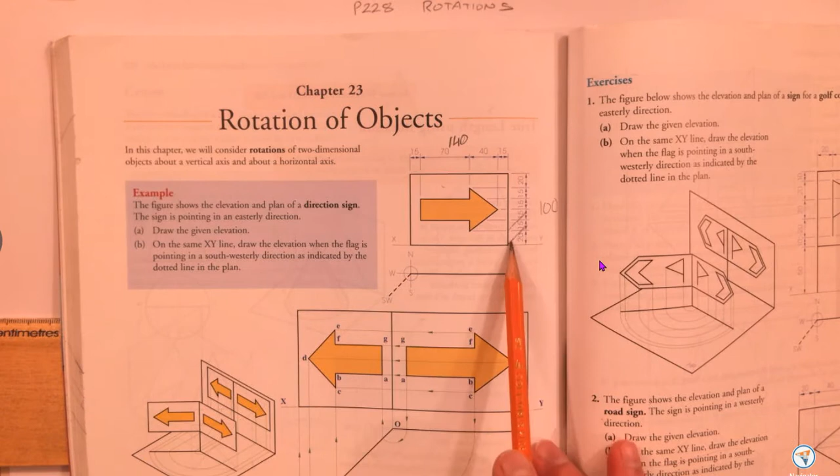You've got a pile of measurements here, 15, 70, 40, 15, and then you have a load of measurements down the side. Basically what it means, we draw our XY line. It's 100 millimeters high, 140 millimeters wide, and then we can set in the grid. So when I come to the sheet there, keep close to the top of the page.

When you're doing the question, step down maybe 120 mil from the top. So we want it up close to the top and in the right hand corner. The measurement, 100 high, 140 wide. We draw the box. Our grid, step over 15, 70, 40, and that leaves 15 on the end.

And then when we're working up the way, it's just 20, 15, 15, 15, 15, and 20 left on the top. And then you can set out a grid, and that let us put in the shape of the arrow. I have the arrow put in. Now we need to draw the plan view of the sign.

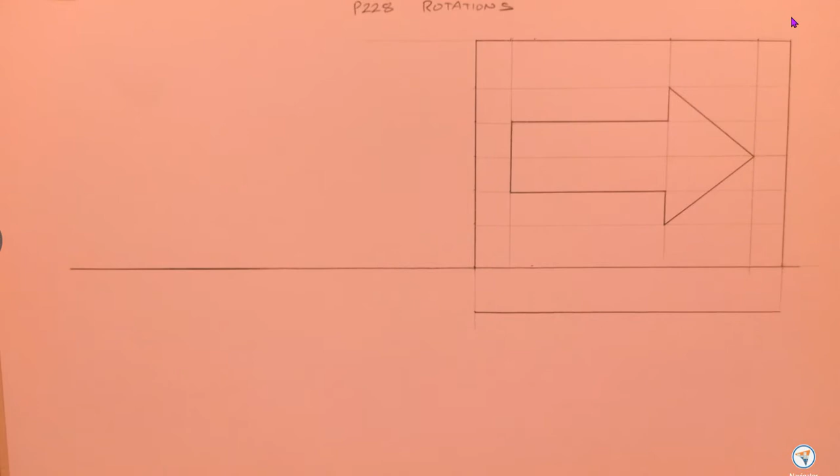To draw the plan view, step down 20 mil, and we just draw a line across. So it's a flat vertical surface, that's why it looks like a line in plan. So our elevation is here, and then the plan looks like a line.

Now back to the question. The figure shows the elevation and plan of a direction sign. The sign is pointing in an easterly direction. On the same elevation, draw the given elevation. On the same XY line, draw the elevation when the flag is pointing in a southwesterly direction, as indicated by the dotted line.

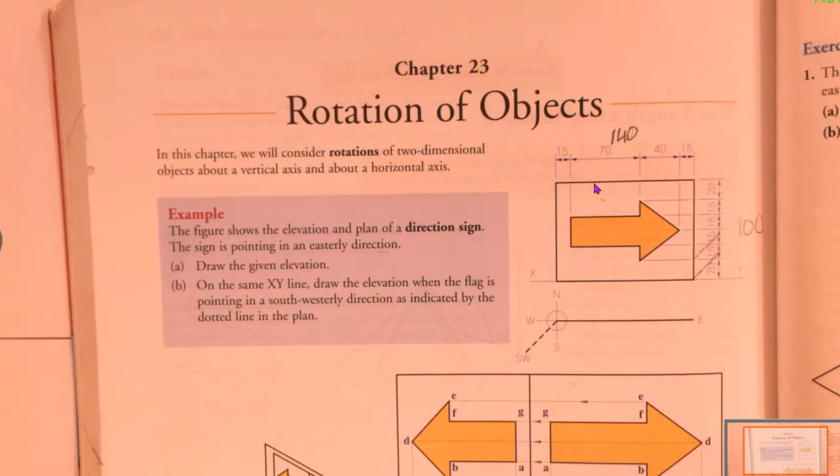So the flag, and if you think of a compass, here's the compass view in plan, it's pointing easterly. They want it to change to a southwesterly direction, which is just a 45-degree angle down in that direction. So when I come to do that, the sign is originally here, we need to change it to a 45-degree direction down there. So we've got our starting position, and we're going to end up with a new position.

Now, as always, we're going to label the drawing. So we'll call the corners 1, 2, 3, and 4. That's our elevation view. When we come down to the plan, the points are directly below. So 1 is here, 2 is in the same position because 2 is directly over 1. 3 and 4 are in the same position because 3 is directly above 4.

Now we have to rotate this sign into a new position. So when it moves in plan, it's also going to move the elevation. So we're going to end up with a brand new sign that's going to basically flip over. So if we took, for example, the phone, what's going to happen is the phone is going to flip right over and into a new position here. And we're going to draw the elevation and plan of that.

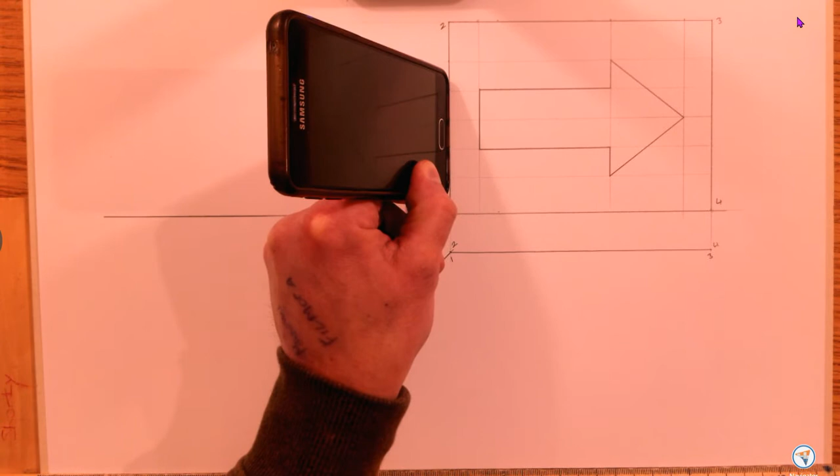In the plan view, it's as if that phone is going to be hinged here, nailed here, and I'm going to swing the phone around into the new position. So it rotates around. So that's where the new phone is going to be in plan. So that's the movement we're going to make with it. To do that, we use the compass.

Our hinge point is here, because it's the joint between the two lines, and we move points 3 and 4 around. So we swing points 3 and 4 around, right around until it hits our line. So point 3 and 4 both come around and they hit at the new point here. So what we've done is we've got the sign and we've moved it from this position to this position.

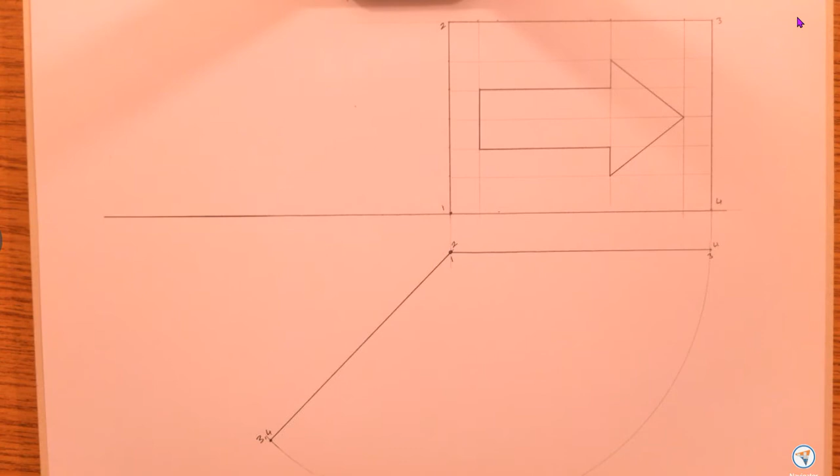We've got our plan. We need to draw an elevation. So we're just going to project an elevation up from the plan like we always would. So if I want to draw an elevation, I project my lines straight up. 1 and 2 are staying in the same position, so I don't need to worry about those. 3 and 4 are just going straight up.

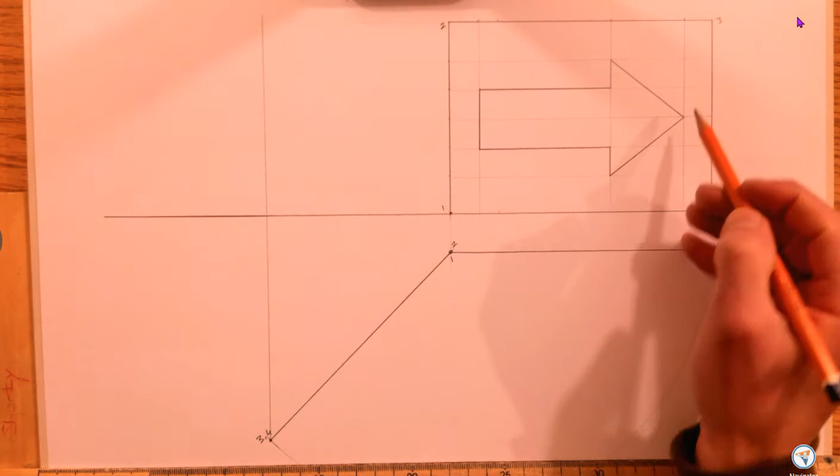The height of them won't change. So point 3 and 4 have been projected straight up. The height of point 3 is over here. It's not going to change, so I just project straight across. So I take 3 straight across to form my new point 3. Here's point 3. So 3 was brought straight across.

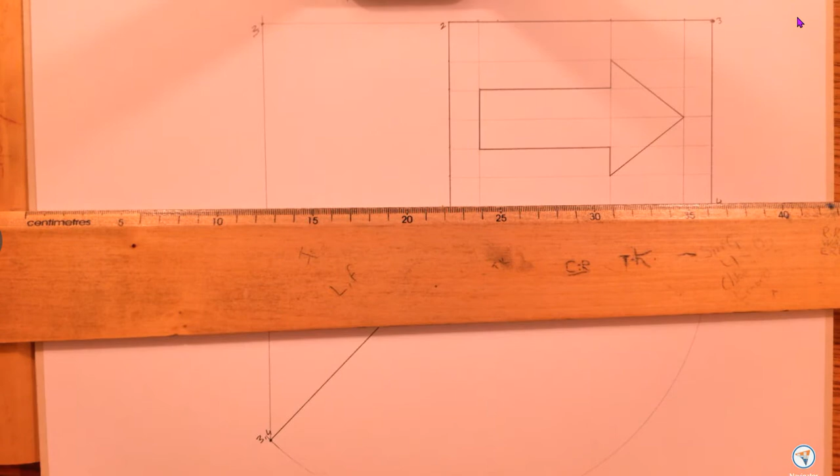Point 4 is the exact same thing. Here's point 4. And again, its height doesn't change, so it's already done for me. It comes straight across. And there's point 4. And that gives me the new position of the sign. So here is my new sign.

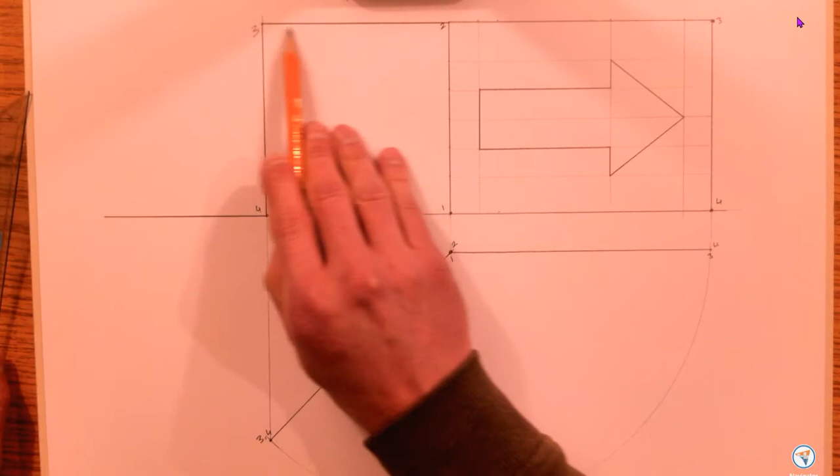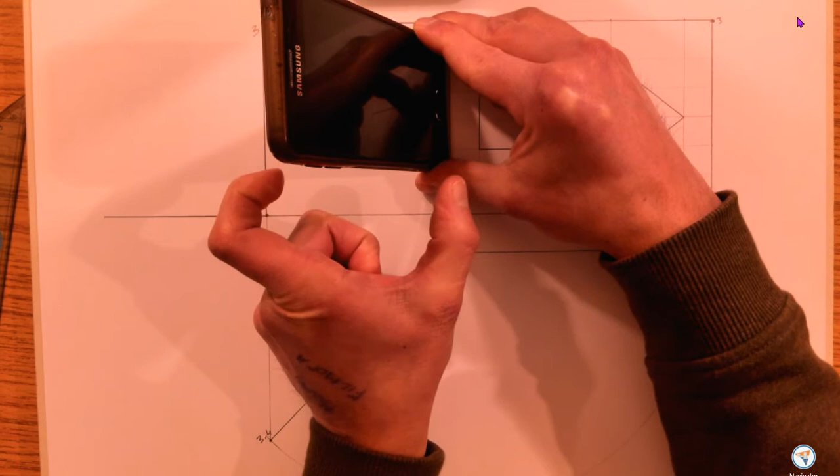And it looks kind of squashed, exactly like the phone does. When I get the phone laid down flat, it looks really wide. When I take the phone and flip it up over, it looks much narrower. So now it's a lot narrower than it was. That's the exact same principle.

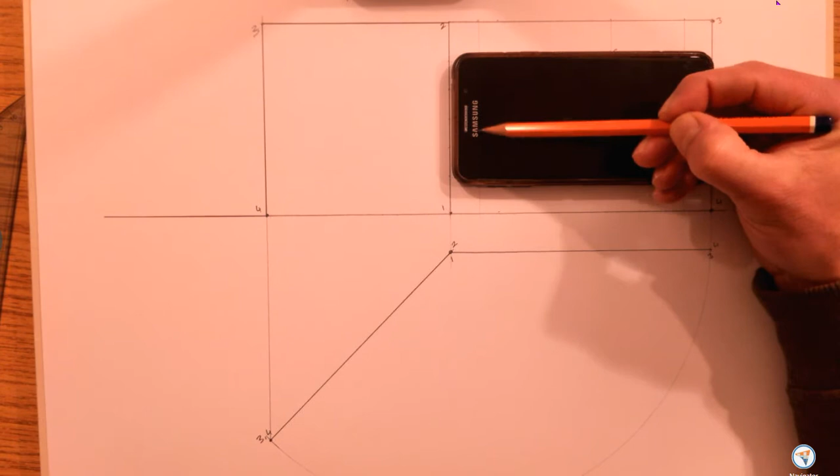Right, we're moving on to the arrow. The arrow is written on the sign or drawn on the sign. I've labelled it up. It's the exact same principle. If I look at my phone again, the Samsung is written on the phone. It's flat on the phone. When I look down in plan at that, I can't see it, but I know it's here. That's where the Samsung sign is.

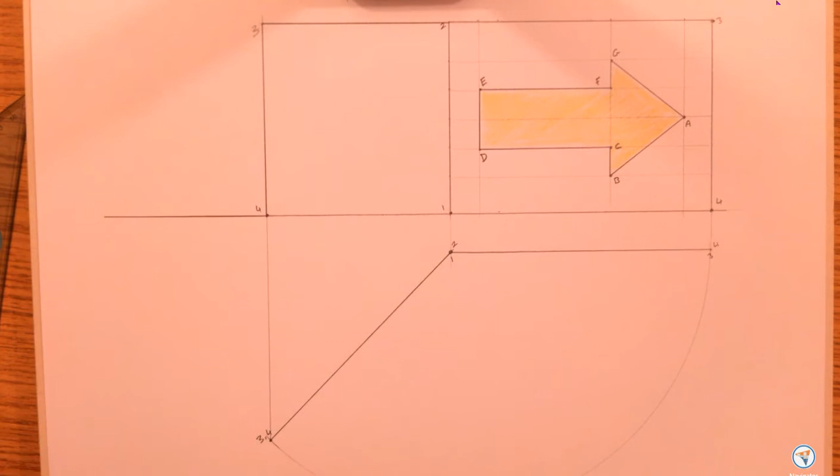So when I move it from there, that's the elevation, to the plan, which is here, the writing is here. It's the same thing. Even though the sign is flat, I know that this arrow is down here. And again, to find the points where it is, I can't see it, but I bring the point straight down. So point A, straight down.

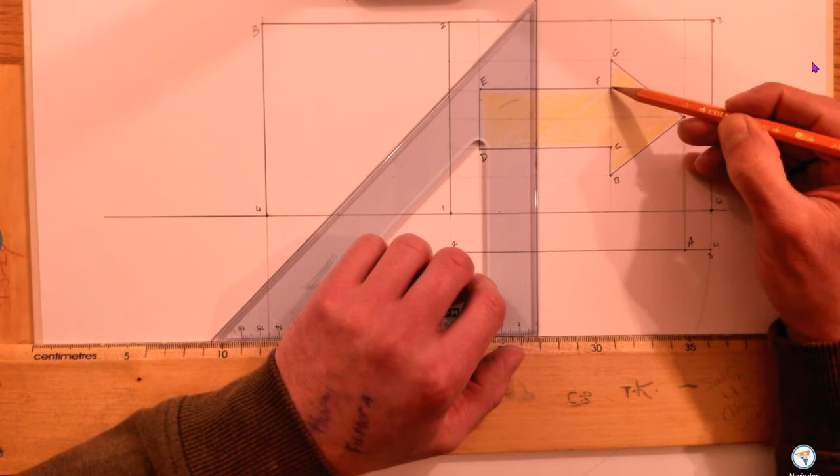B, C, F and G are all directly above each other, so they're all going to form the same line. So when I take those down, that one point represents the position of B, C, F and G. And likewise here, these 2 points are lining up, so when I bring the 2 of those straight down, those are going to end up being down here. So that gives me the points for all of those. That's D and E.

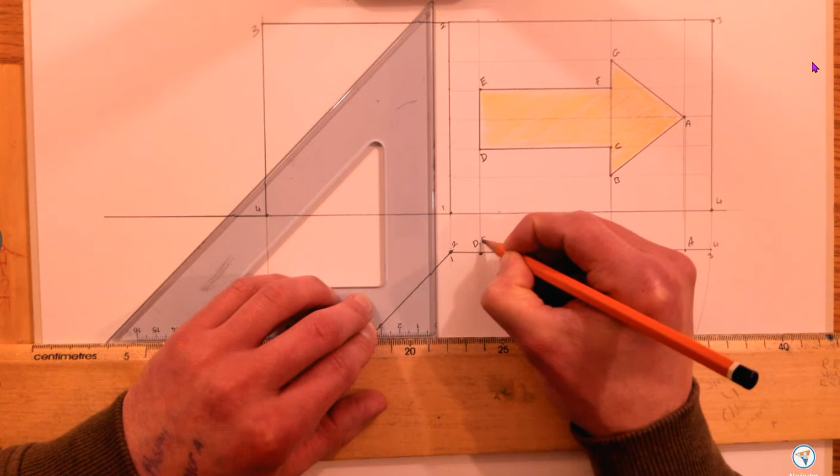I've got my points labelled in elevation. I've got my points labelled in plan. I need to bring those points to the new elevation and plan. And we'll start with that. Again, the same thing. If the sign moves, that arrow has to move with it.

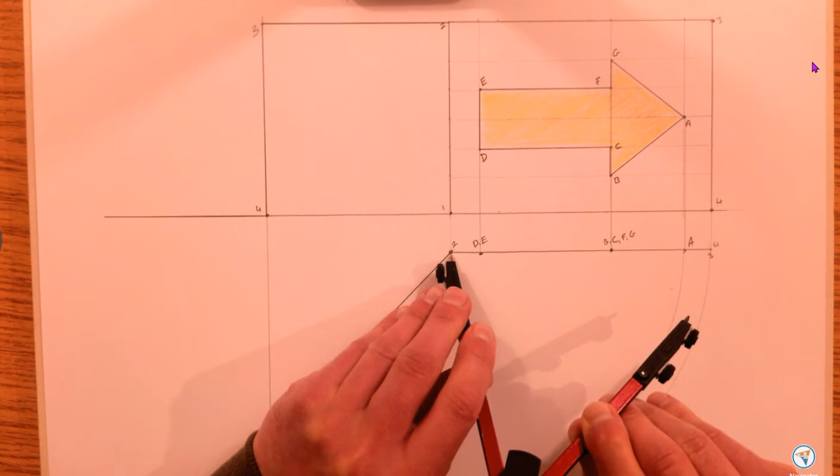Compass point goes on the hinge, which is 1, 2. And I swing around point A. So I stretch out to point A and swing around. And that gives me the new position for point A. This is a pretty quick question because B, C, F and G all come together. So all of those points move around together. And D and E the same. Compass point stays on the hinge point all the time.

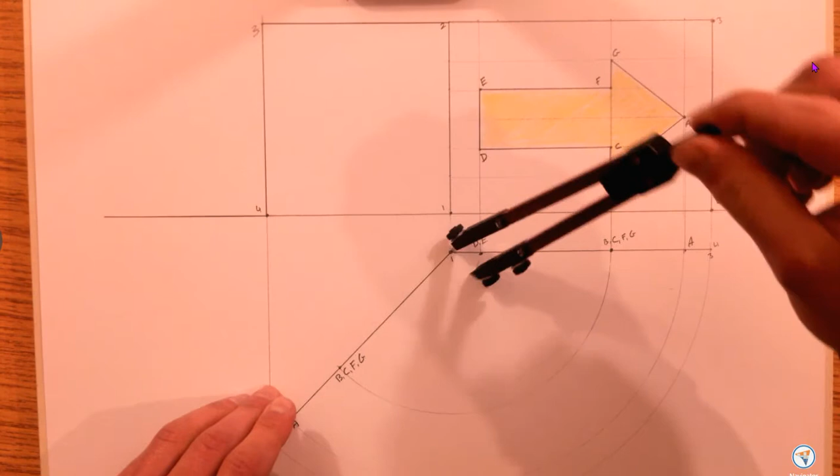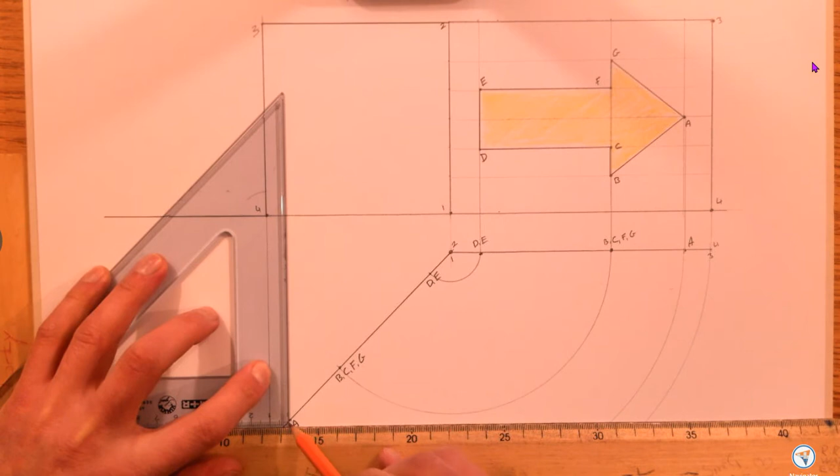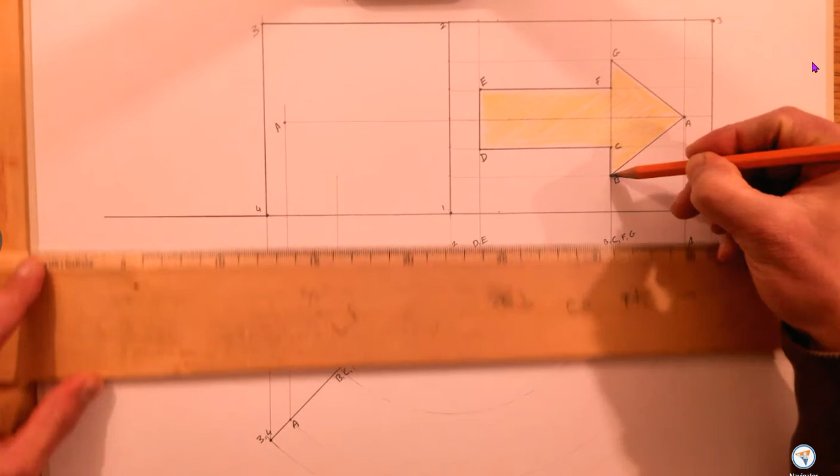I've got my points in plan. I need to find those points in the elevation. And again, point A is going to be exactly the same as every other point. Point A comes straight up into elevation. The height of it doesn't change, so A comes across. B, exactly the same. B comes up, B comes across from elevation. C comes up, C comes across.

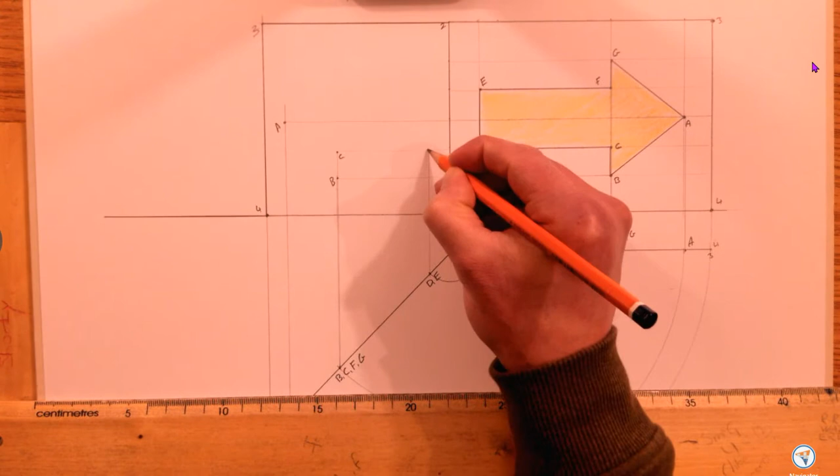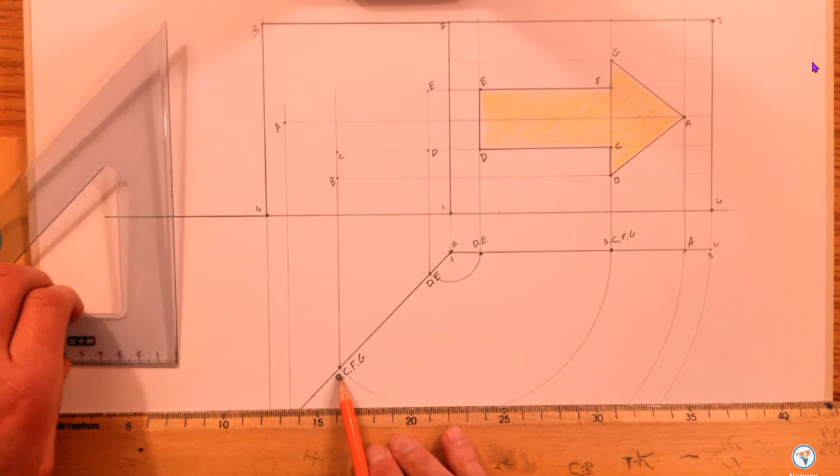D comes up and D comes across. Same with E. Point E comes up. Point E comes across the T-square. F is here. So F is brought straight up and F comes straight across. Likewise for G. G from plan brought straight up, and G, which is here, straight across.

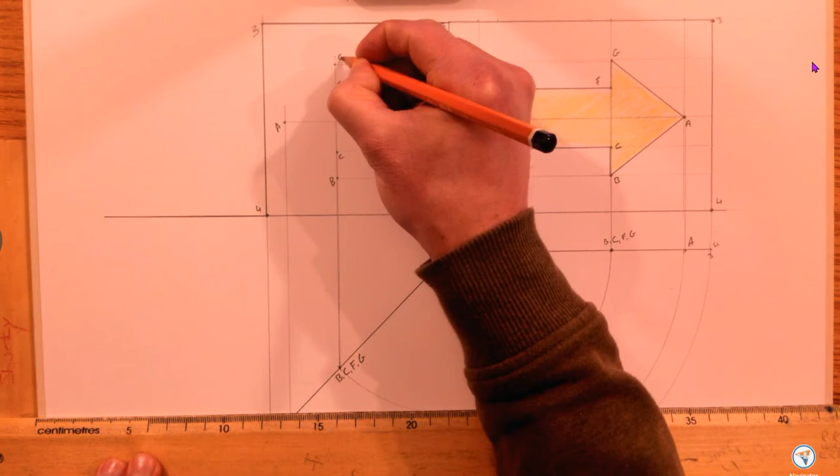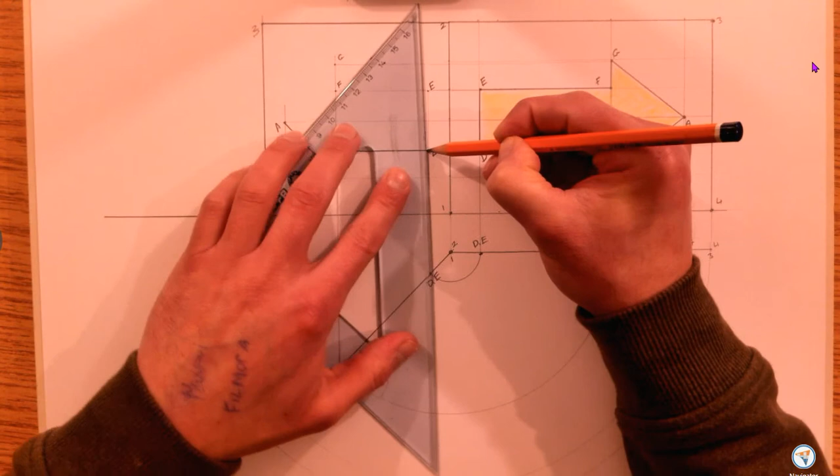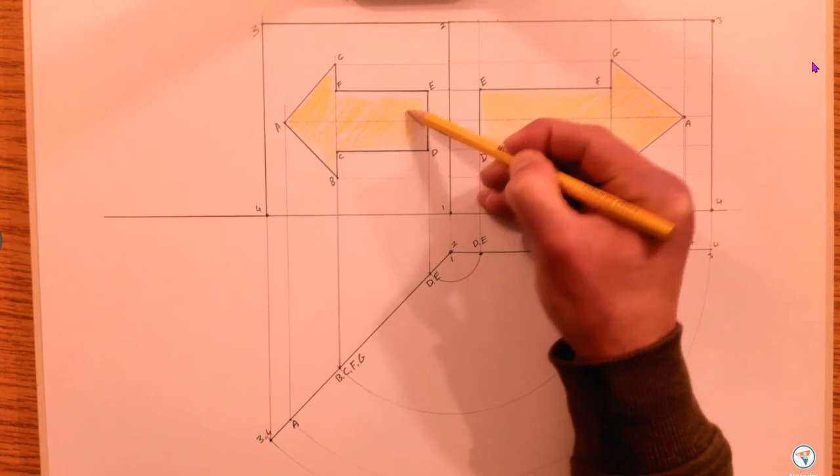And it's just like join the dots. A, B, C, D, E, F, G, back to A. Again, all I got to do here is join the dots. I don't need to think about what it's going to look like. A to B, to C, to D, E, F, G, and back to A. And that is our rotation complete. Here is the sign, and you'll see it's back to front. So it's been flipped the other direction. And that's the question finished.